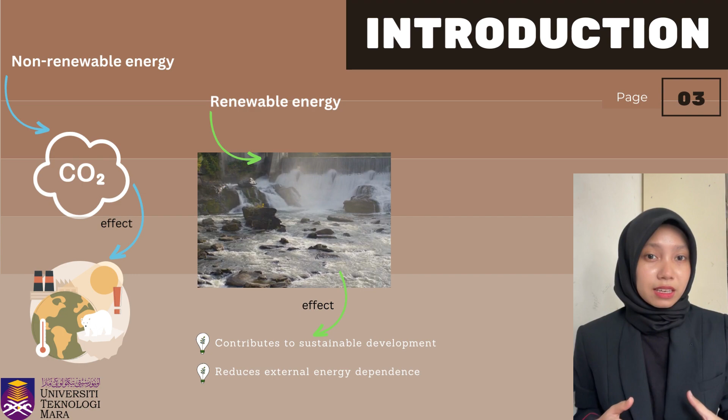Therefore, it is important for us to start using energy generated from renewable sources, such as hydropower. It is clean energy. The energy is obtained from falling water, which is rainwater, so it doesn't consume resources and is non-polluting. This type of energy offers an excellent way to reduce external energy dependence since it is an abundant resource in our country. Next is the literature review.

The Raub Australian Gold Mine Company built a hydroelectric station on the Sempam River's bank close to Raub, Pahang in July 1900, marking the beginning of the usage of hydropower in Malaysia. However, Malaysia did not have economic access to hydropower until the late 1970s. No attempt has been made to use the techniques in pico hydropower, despite the fact that Malaysia has benefited from large hydropower projects.

The International Renewable Energy Agency presents three categories of hydro turbines, which are high head, medium head, and low head turbines. The categorization is based on the amount of power the turbine produces as well as the head and flow rates of the water. Large capacity is more than 100 megawatts and small scale is up to 25 megawatts, and can be used for the national power grid.

Mini hydro, with a capacity below 1 megawatt, is used for micro power grids. Micro hydro, ranging between 6 to 100 kilowatts, can be used for small communities, and lastly pico hydro, with a maximum of 5 kilowatts, can fit domestic and small commercial loads.

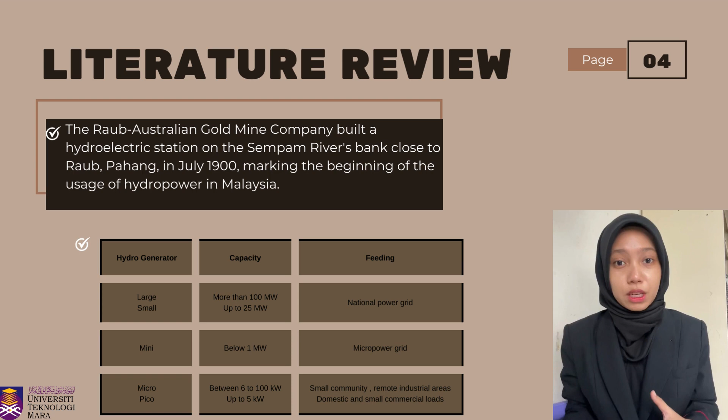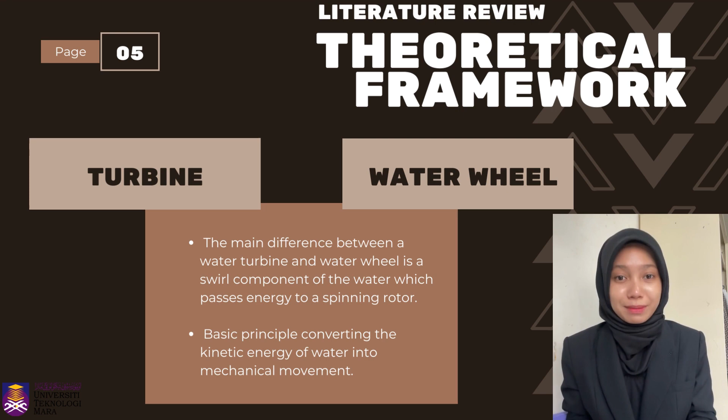The main difference between a water turbine and a water wheel is the swirl component of the water which passes energy to a spinning rotor. However, the basic principle is the same, converting the kinetic energy of water into mechanical movement. There are three types of water wheel, which are undershot, overshot, and breastshot water wheels, as shown in the figure. The overshot water wheel is more complicated in its construction.

The buckets are filled with water flowing onto the wheel through a penstock design. The gravitational weight of the water in the full buckets causes the wheel to rotate around its central axis. The middle shot or breastshot water wheel design is where the water enters the buckets about halfway up at axle height and then flows out at the bottom in the direction of the wheel. Generally, the breastshot water wheel is used in situations where the head of water is insufficient to power an overshot water wheel design.

And in our study, the undershot water wheel design, also known as a stream wheel, was the most commonly used type of water wheel design, as it is the simplest, cheapest, and easiest type of wheel to construct. The wheel is simply placed directly into a fast-flowing river and supported from above. The motion of the water below creates a pushing action against the submerged paddle.

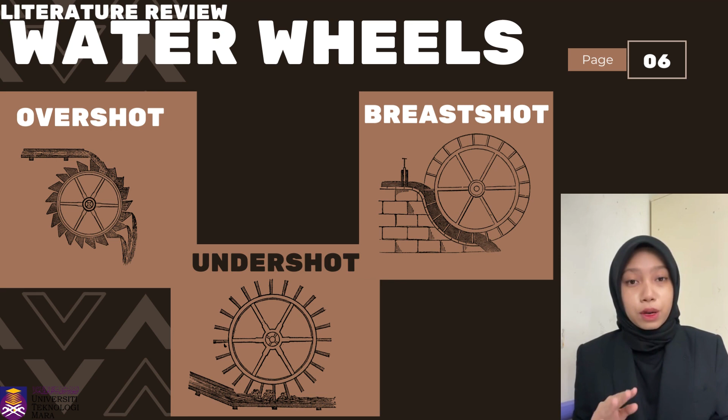This type of water wheel design is generally used in flat areas with no natural slope or where the flow of water is sufficiently fast-moving. Problem statement. Electricity is globally fundamental for many purposes, including those in industry and household. Residents of Mahang River need to utilize electricity for lighting, ventilation and charging. Higher electricity bills result from this. Low-income residents will pay high electricity bills and endure challenging days.

The poor receive less benefit from electricity in rural regions than those who are not poor due to restriction caused by high connection costs. Next, a lack of knowledge about how to maximize the advantage of rural electrification. The objectives of the present study are to evaluate performance of the undershot water wheel as pico hydro with different flow rates by looking at power generated and efficiency. And the second objective is to determine the effect of the number of blades on the power produced.

Scope of the project: the study will be conducted at Sungai Mahang, Negeri Sembilan. The development of the turbine includes various research components, including gathering fundamental information about the technology being used, developing concept design and analyzing test outcomes. Limitations of this project consist of number of blades, the water level is below 1 meter, the area of the Sungai Mahang will be based on estimation, the inability of the researcher to access the site for inspection due to continuous heavy rain, and last one is small scale of design.

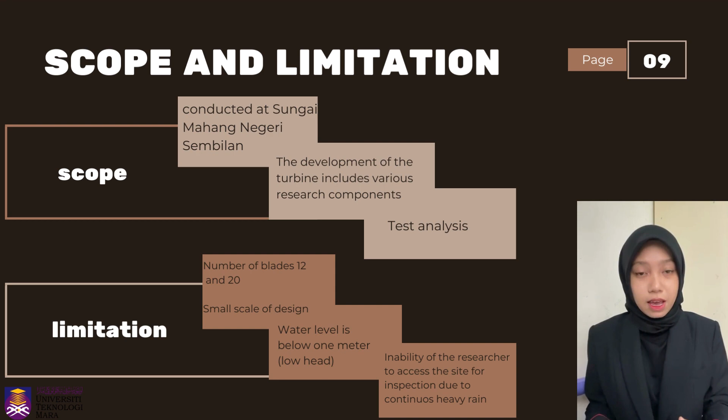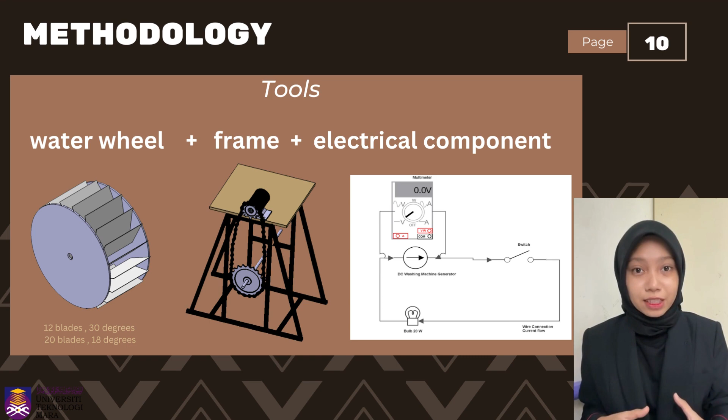Next, moving on to methodology. The proposed undershot water wheel installation at the site will consist of the following components. The first one is the water wheel model built from CATIA software. There will be two different types of water wheel that will be tested. Second is the frame that will be the support device. The design consists of a vertical chain drive and triangle mechanical frame that gives stability during experimental work, and basic electrical components such as a generator that converts energy, connecting with load and multimeter.

For conducting experimental work, begin with river water that runs and splashes against the bottom blades, and the wheel will turn. The transmission will then advance the rotation, with the chain rotating from the chain driver to the chain driven upward. Kinetic energy is converted by the generator into electrical energy. The voltage produced by the generator is measured using a multimeter. Next, variables that are changed are flow rate of the river water and number of blades. Variables that are measured are voltage and current, rotation speed and power.

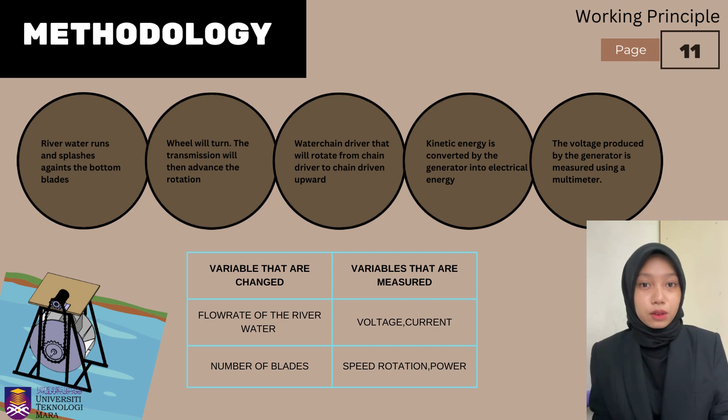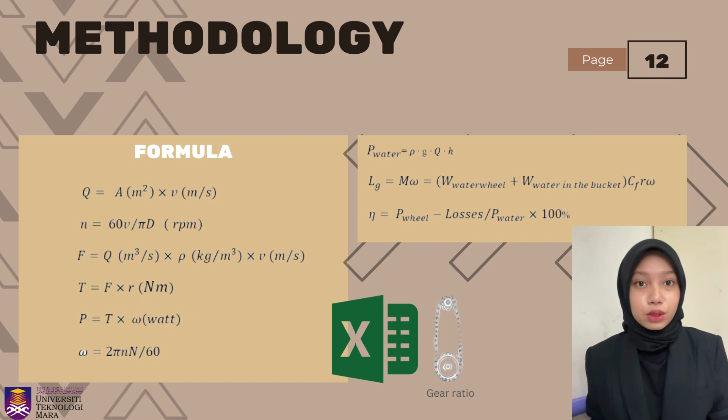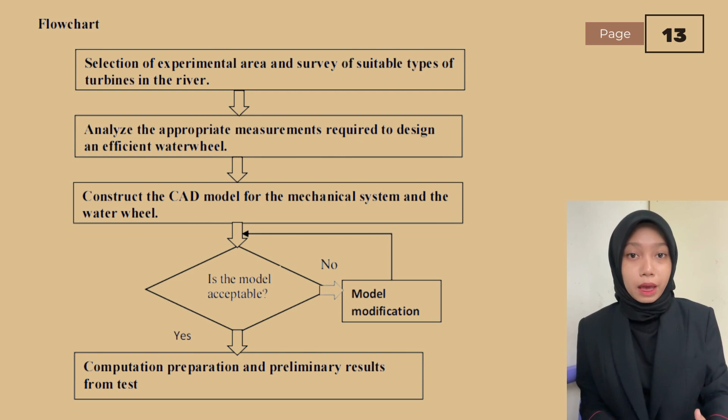For the analysis, Microsoft Excel will be the main software used to calculate power produced and find efficiency. As an example of the formula that will be used, flow rate equals the cross-sectional area of the river multiplied by the speed of water. Additionally, we include mechanical losses in this calculation to obtain power produced and gear ratios for our chain drive. Next, this flowchart represents my design construction of the water wheel. I started with surveying the suitable and proper type of water wheels and area, followed by constructing the CAD model on CATIA.